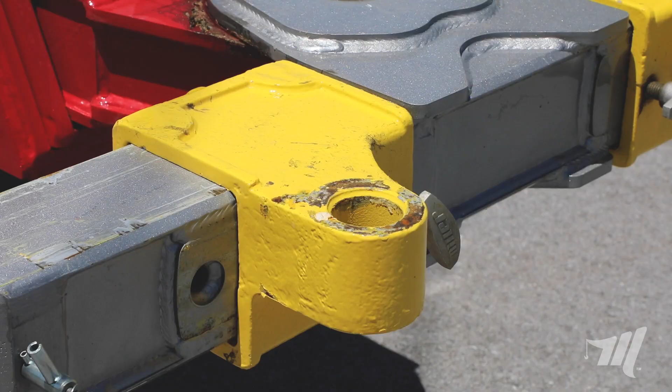Today we're going to talk about fork holders and the evolutionary changes that we've made from 1986 to 2021.

When we started this game with the SDUs and T1s from the Challenger line and the Holmes product, we had the fork holder fitting over the crossbars, sometimes 5x5, 6x6. Those fork holders were as high as the crossbar, just a little bit taller than 5 or 6 inches. That really made it difficult for that fork to get up underneath the axle.

Somewhere around 1989, a friend of mine, a client down in the Los Angeles market, took his SDU 6x6 fork holder and cut about half of it off, making, from what I saw, the first low-profile fork holder.

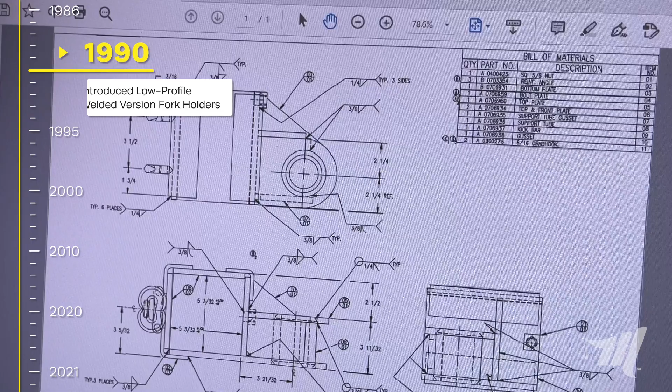From there, in 1990, with the introduction of the 5030, we went on with the welded version of the low-profile fork holder. The issue with that was we were dealing with 12 to 13 individual pieces of steel and had a lot of heat draw.

So about 5 years after that, we went to the current fork holder we know today. We've been using this cast fork holder for almost 2 full decades—low-profile concept, being able to use it one of 4 different ways.

The T-handle that was on here only really holds the fork holder in the crossbar. It doesn't keep anything from sliding when it's under load. That locks up on itself. And there are 2 hooks in the back for the tie-down features on the chain.

But today, this is out the window, and we're going to show you the new version. Just like all the fork holders in the past, the new Evolution fork holder gives you all the same features and benefits.

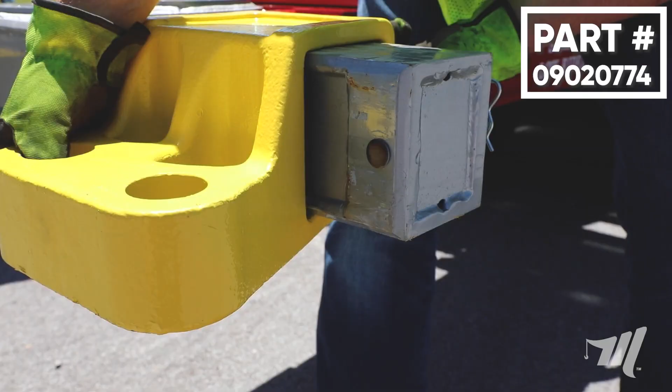No matter what position you go to—if it's the offset to get your greatest distance in the low profile configuration, or flipping it over to go to the high position—you get some more reach, saving yourself maybe a trip to the back to get another frame fork. You can just take your fork holder and get 2.5 more inches.

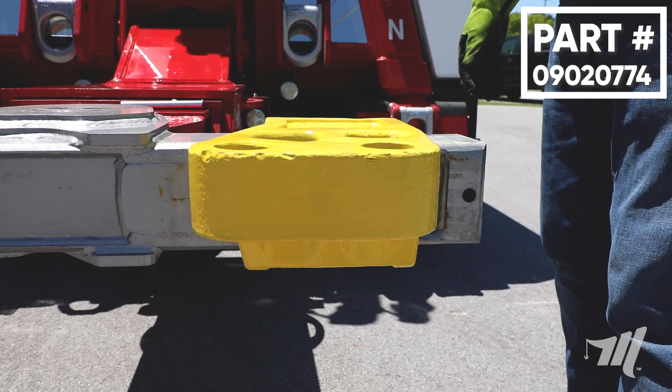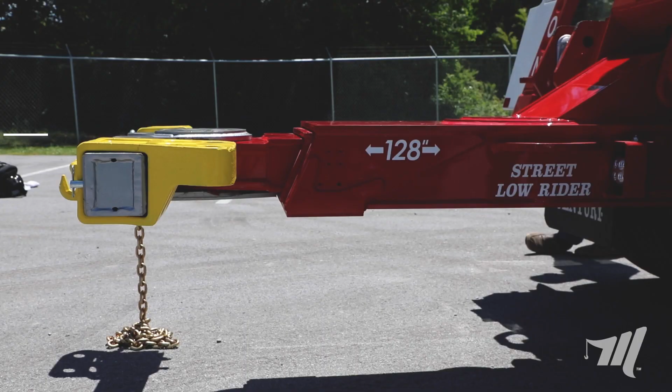Mike, why don't you explain where in the past you may use it to reduce the overhang? Well, I've flipped them over before, John, to where the receiver is actually facing towards the tailboard of the wrecker, and you gain about 1 foot—so you're losing 1 foot of overhang. You're probably putting about 1,500 pounds less on the wrecker, so you're getting it close to the truck. These are awesome for that, I think that's a great idea with these things.

That's something you'd use with those heavy fixed-frame vehicles weighing 16, 18, 24,000 pounds in order to reduce that overhang like Mike was talking about. It works great on something like a vac truck, going down the road towing one of those heavy things by that rear. You put it forward—you always want to get as much weight off this wrecker as you can.

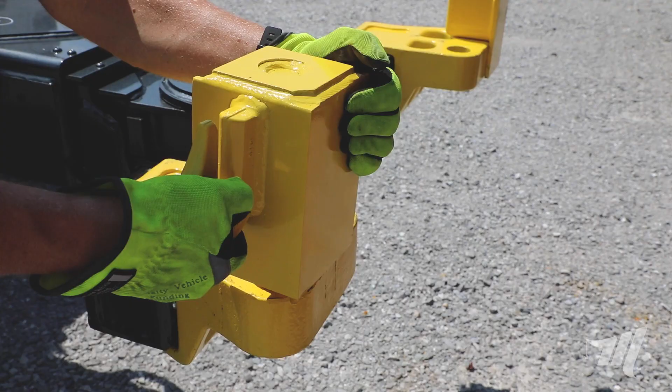The full Miller lineup of all our frame forks fit in either one of the 2 holes for each application, and also all of our towing attachments. Mike's showing you here the hook adapter, which has been redesigned to fit in here. The nice part about the way this hook adapter has been redesigned is it gives you a nice flat face when matching up to the bumper using your piece of aluminum or wood. That's a nice feature on that.

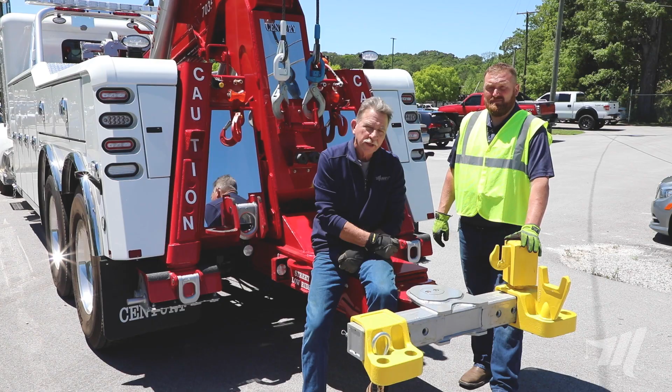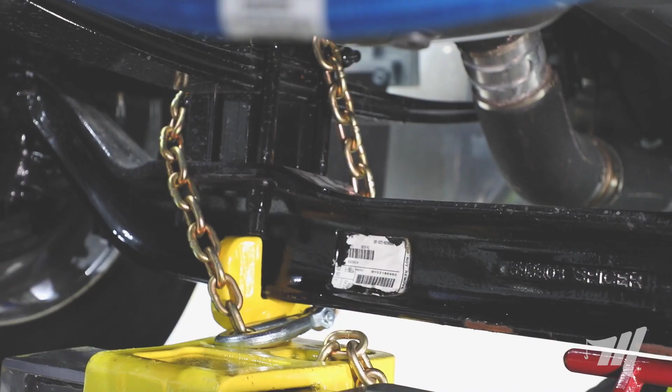The other thing we want to mention is the tie down, and we're going to do a whole separate video on that. One of the unique things we did above anyone else is that in tying this down, we created 2 separate holes to allow our chain to come right over the axle, so that when you're chaining the axle down, it's not going to flex or stretch as the tow truck goes up a hill or down.

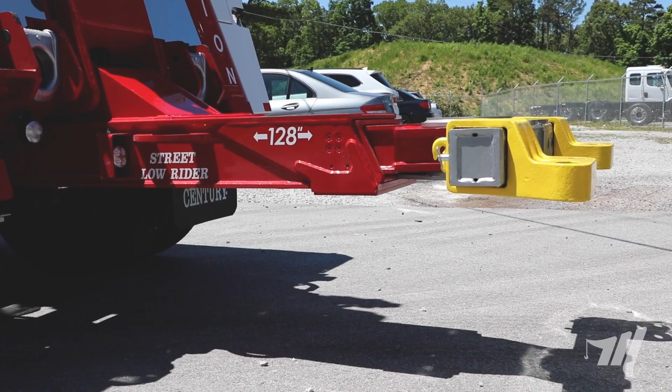Believe it or not, these receivers have been in the field for over a year being tested. The one thing we did was finite element analysis, actually looking at the stress that goes on, because we're reaching some 5 inches wide, some 44 inches from center line of hole to center line of hole.

There's a tremendous amount of stress here, so we concentrated on making sure nothing is hanging off the crossbar, keeping this area very cool. I see some of these offset fork holders way out here—gentlemen, ladies, I'm telling you, you're getting yourself into trouble. It's very important that this whole leading edge stays on that crossbar to hold the support for the weight these holders are actually going to see.

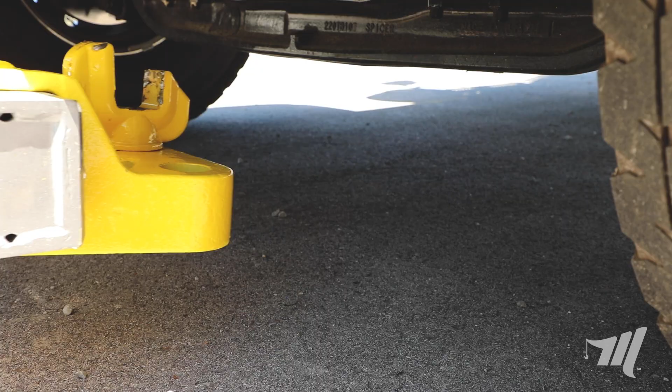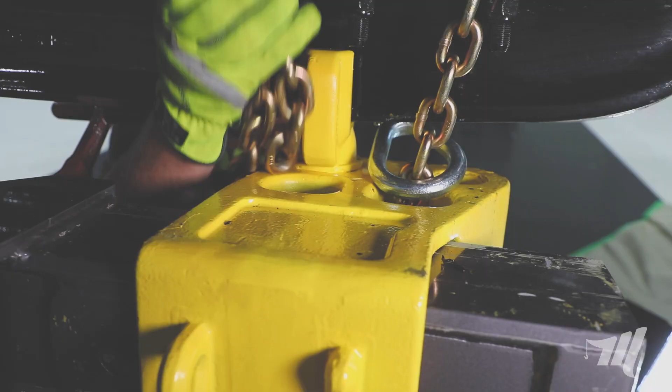As we close out this short video on the Miller new dual Evolution fork holder, a couple things I want to talk about: we've got a video coming up with Mike showing the unique tie down that goes with this system. That'll be totally separate in itself with a different part number—really neat, quick, effective, and efficient.

The other thing is the timeline on cut-in. As you're seeing this video, these are just coming into our marketplace, being supplied by the new casting company. We're looking for this to become standard on all of our 5x5 fork holders, but also as a parts order for you all in the field who want this feature and benefit. Reach out to your local Miller distributor.